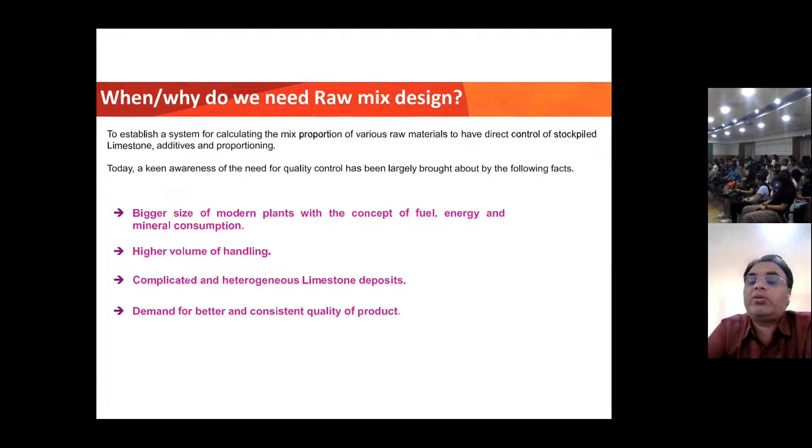So here to save the fuel energy and to use the alternate fuel, we are using AFR, alternate fuels, like the waste products I told you from many of the industries, right? And the mineral also. Suppose everyone is using the high quality limestone, then there will be depletion, and after some time there will be no good quality limestone. So alternate sources of limestone can also be used. In my next slides I will show you what are the other sources of limestone.

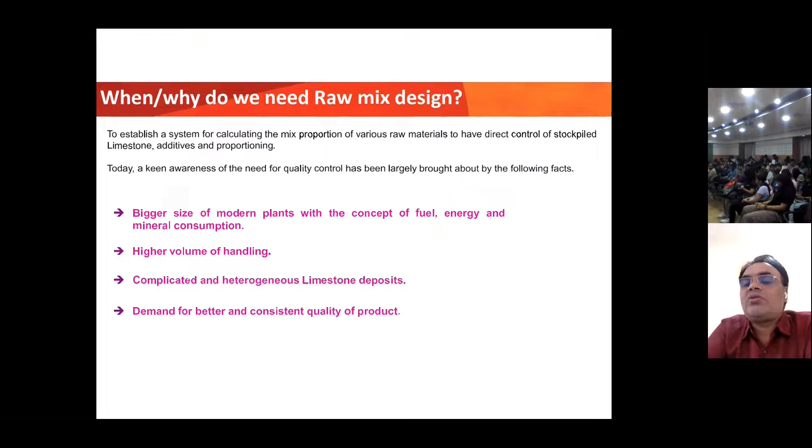And higher volume of handling, complicated and heterogeneous limestone deposits. Why modern systems need this type of upgradation is that before, nobody bothered whether your limestone deposit is heterogeneous or what. They were just taking the good quality limestone and depleting the other one. So they were not properly utilizing the limestone, right? Now we use everything; if rejected limestone is there, we use it in a proper way so that we can have conservation of natural resources.

And also, as I told you, the customer perspective has changed. Now they have become educated. Everybody is aware about the quality. Before that, nobody was aware. For them, cement was only cement, right? If it had that binding effect, they said it is cement. So nobody bothered about the quality. But now the customers are very educated, so they are demanding what they require, whether it is setting time or quality.

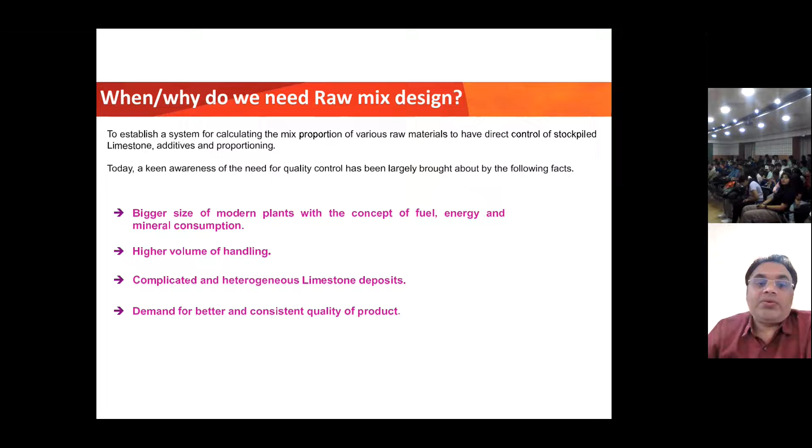Similarly, the raw mix. At that time only a few plants were there, so the deposits were very good, and there was hardly any situation where apart from limestone you had to use other raw materials in the raw mix design, right? Raw mix design is basically the design you make for your clinker and finally your cement. If your raw mix design is okay, your clinker quality will be okay, and finally your cement quality will be okay. So to ensure proper cement quality, you should have a better raw mix design, and for that, better raw material.

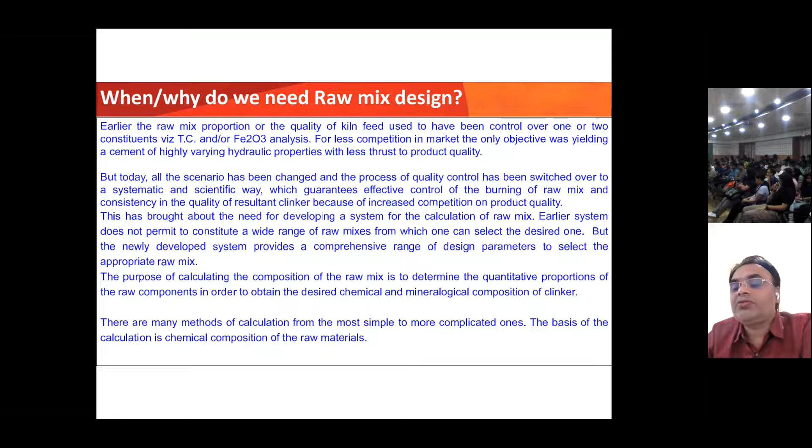As I told you, before, they were just selecting the good quality limestone, using it and making the clinker, right? But there was depletion. Now we have modern systems like CBA, that is cross belt analyzer, which selects the quality of limestone without deviations, so you do not have to do a lot of homework, and no quality deviation at the clinker stage.

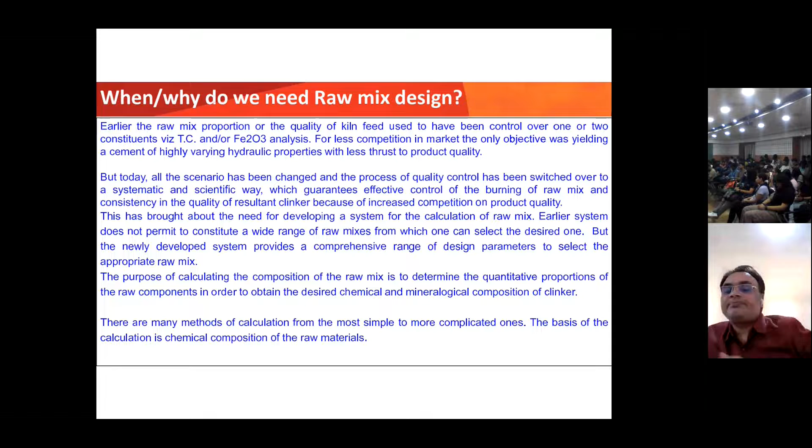Let me explain, because I'm always saying clinker, so you may be confused about what exactly clinker is. Clinker is basically the raw material for making cement. The raw mix you have made, after grinding, goes through preheaters with different heating capacities in the different cyclones, like 6 stage, 7 stage, and the material is very slowly burned, and different reactions happen. Starting from 150 degrees Celsius, the moisture of the ground raw mix is evaporated.

After that, entering the next system, the temperature is 300 degrees Celsius. Then in another cyclone, the same material is at 600, where there is dehydration, or calcination of magnesium carbonate. Limestone is basically calcium carbonate, and for making clinker the basic important parameter is lime, right? So at 800 to 850 degrees Celsius, calcium carbonate is dissociated into lime and carbon dioxide. This is the stage where carbon dioxide is released, at 850 degrees Celsius, right?

At the pre-calciner zone, this carbon dioxide is going to the atmosphere and polluting it. So we have to work with your guidance, with your experiences, because you are the new students, and new students have a new type of technology. We are with the old technology, old mindset. So here help is required from different research activities on how to capture that carbon dioxide.

Of course, research activity is going on globally on how to take the calcined carbon dioxide and use it again with that waste lime to make it limestone, so that limestone is not depleted, and the raw material you have made from arresting that carbon dioxide and the lime from the other raw materials can be used as limestone for making other clinker, right?

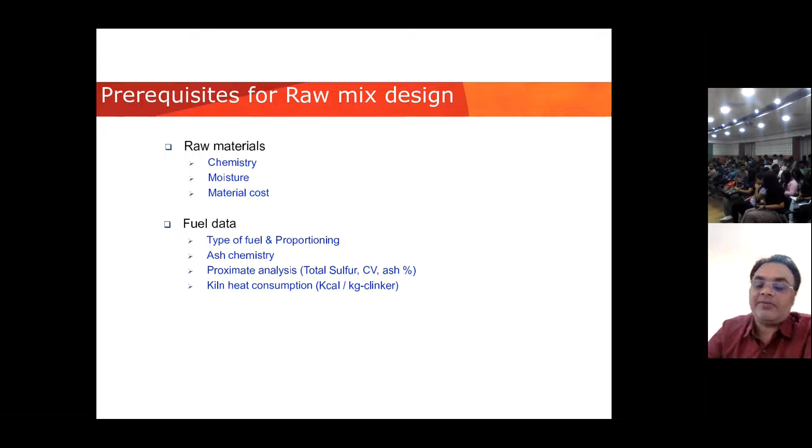In the kiln, the material at 850 has lime, and of course the other raw materials are also there, like alumina, iron, and MgO. So it all forms the clinker phases: C3S, C2S, C3A, and C4AF, right? So from the raw material, C3S and C2S are there.

All are governed by three governing factors from the clinker to the finished product, that is LSF, SM, and AM. LSF is the lime saturation factor, and it has a formula I will show you. Silica modulus is there, and AM is the alumina modulus. And finally, inside the kiln, your clinker is formed at a temperature of 1400 degrees Celsius, for which fuel is required.

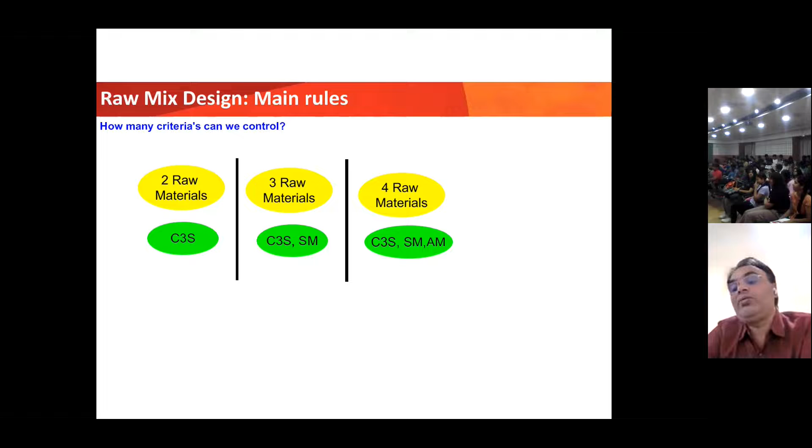The fuel is required both at the calciner stage, where there is calcination of calcium carbonate to calcium oxide and carbon dioxide, and similarly for your clinker phases, C3S, C3A, which should be good in the clinker at the kiln, that is at 1400 degrees Celsius.

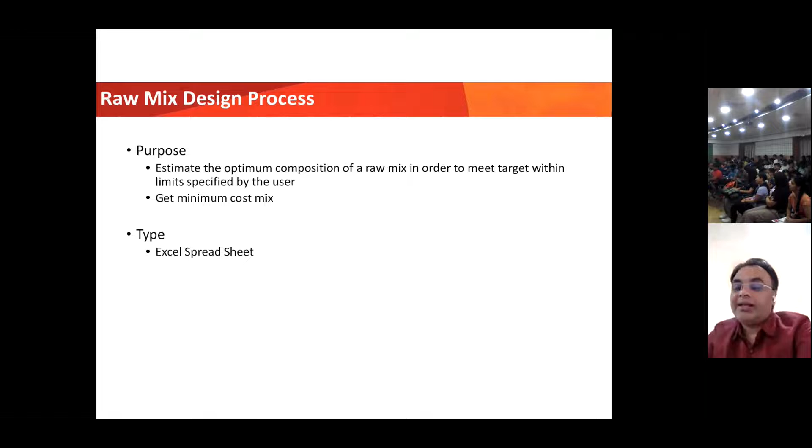So finally, when your clinker is produced, you are grinding at the cement stage. If you are making OPC, only your clinker will be ground with the gypsum, right? That is ordinary Portland cement. And if you want to make PPC, then power plant fly ash is added with this clinker and gypsum, and your PPC is produced.

And if slag is there, then clinker, gypsum, and slag are added, and your slag cement is produced, right? So this is the raw mix design, how it is designed. You can see that we are selecting, suppose, limestone, and clay if any deficit is there for alumina or silica. And if your limestone itself has all the properties, then no clay, no sand, no iron, nothing is required, right?

But if there is some deficit of alumina or iron, then other components are used. After that, you will write the chemical composition, what is the percentage of silica, what is the percentage of alumina, through different instrument techniques, like XRF, which is based on X-ray fluorescence, and XRD, which is diffraction technology. So this is the chemical composition based on the XRF study.

And finally, as I told you, cost is also important. If you compare cement with other products as far as inflation is concerned, cement cost is still on the lower side, right? For the cement industries, we cannot stop the infrastructure activity. So cost is also a very important part that we have to look upon, right?

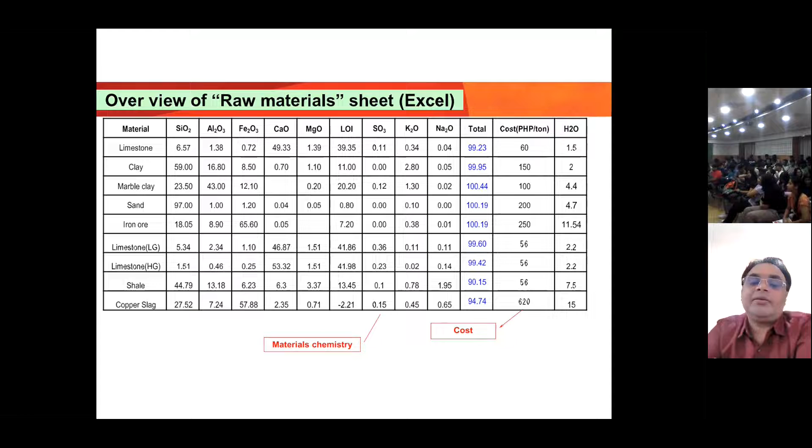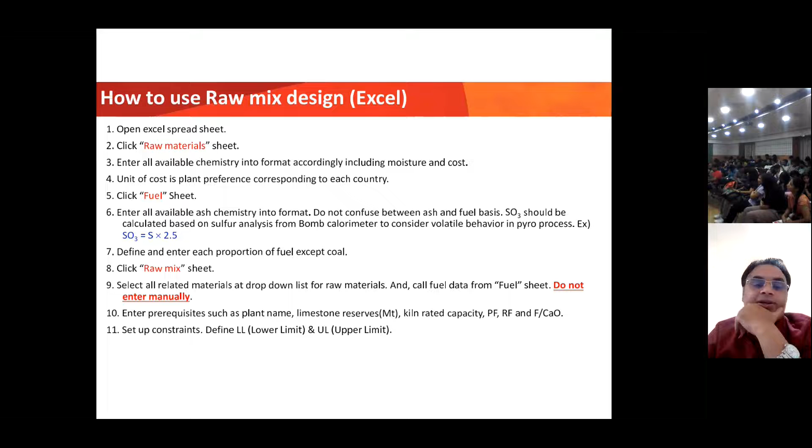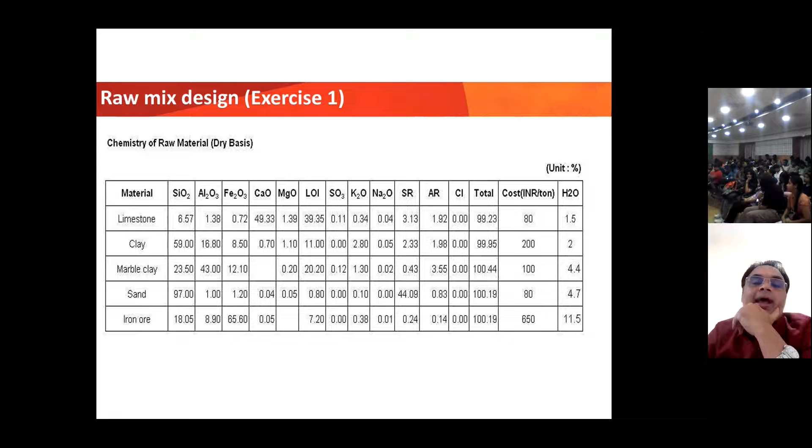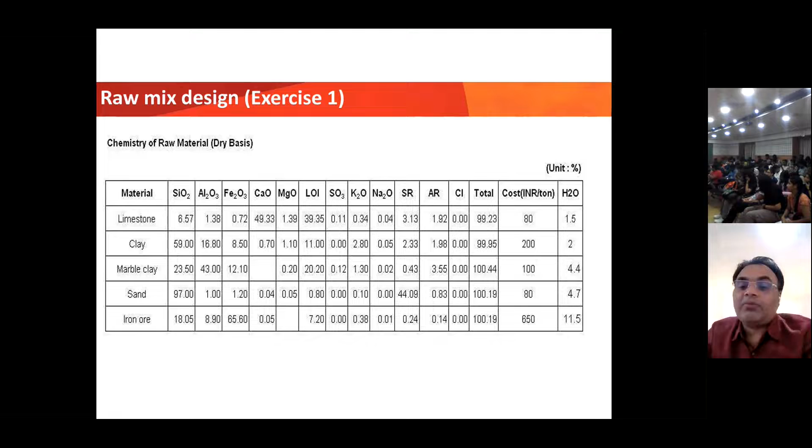So this is the Excel sheet that I have shown. This is calculated based on this one, and this is just based on the raw mix design. So I will not go into the details. This is the limestone quality, and what I was talking about, like alumina ratio and this one. So limestone is there. The basic components are silica, alumina, iron, lime. In limestone we see only lime. MgO is also a requirement, and sulfate, sulfur is also a requirement, and with that alkali like K2O, Na2O. I think you are a chemistry student, so definitely you might know what silica is, and with the XRF we convert them into the form of oxides, right?

And the main important thing is your fuel. Fuel is also very important, and as you know, the fuel is used to burn that raw material, because finally your clinker is produced at a temperature of 1400 degrees Celsius, or in some plants the burnability is very hard, where you have some quartz content. Because I told you that if you go into details, many things are there. If everything is given to you but the burnability is still not there, then you have to look for other research instrument techniques to see why it is happening, right? And finally you have to come to a conclusion. You have to see which raw materials have less burnability, which is easy burn, which is very hard burn, because high fuel will be consumed in that one, right? So finally, coal is being used.

So coal, you know, is used at almost 11 to 12% of whatever clinker is produced; 11 to 12% of the fuel is being consumed to burn the raw materials, right? And when there was huge consumption of coal, everybody started crying that after a few years there will be a scarcity of coal, so we have to look for some alternate options, right? So then pet coke came into consideration, because pet coke was the waste product from the oil and petroleum industries, right? It contains a good amount of calorific value, because CV is very important.

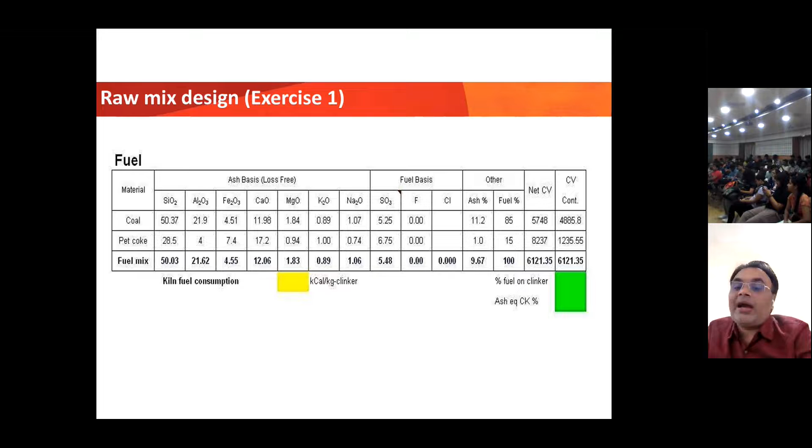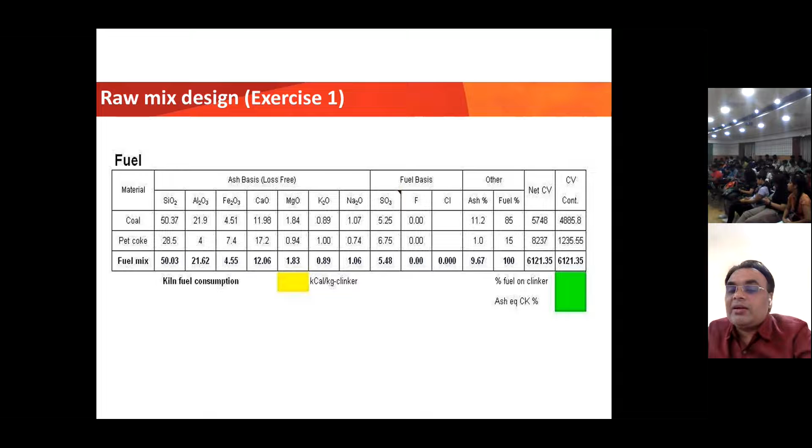You can see that whatever I have highlighted is written as net CV. Whatever fuel you are selecting is based on your net CV, that is net calorific value, right? So this plays a very important role in deciding the fuel mix you are going to give, and the burnability of the raw materials, right? And finally, the important parameter is fuel consumption, right? So this is the waste product. As I told you, we are also using a waste product as fuel, that is your pet coke, right?

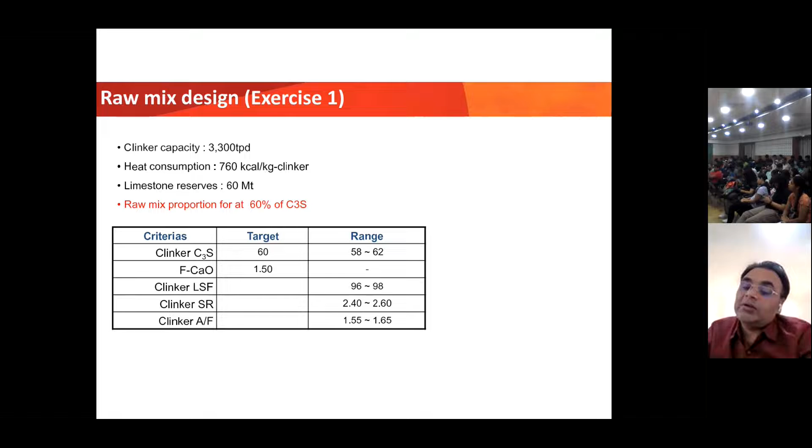These are the proportions of your clinker capacity. Clinker C3S is always in the range of around 58 to 62, and if it is on the lower side, then your clinker has very less strength, and finally your cement will have less strength. For making your clinker C3S in the range of 58 to 62, you need the LSF between 96 to 98, and similarly the silica ratio of 2.4 to 2.6. And all these important parameters like your LSF, silica ratio, and A/F, that is alumina modulus, these ranges are used to get your clinker with C3S percentage of 58 to 62.

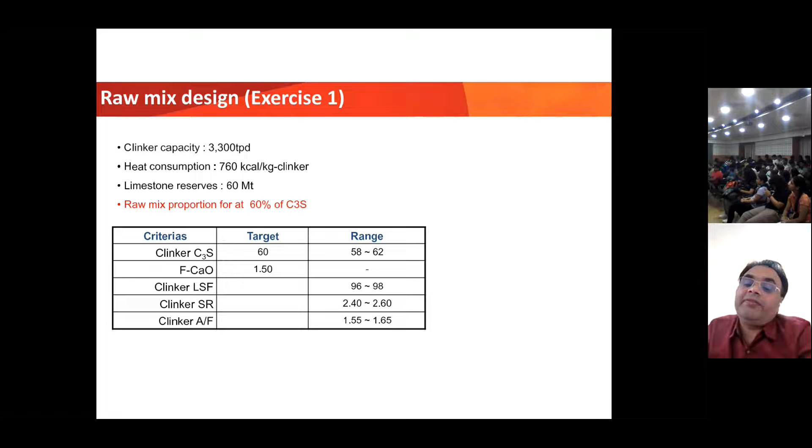You might be aware that if I'm talking about waste products, then red mud is also a waste product from the alumina industries, right? So like slag, fly ash, and AFR (alternate fuel resources) are waste products, similarly red mud, which is a waste product of the alumina plants, is also used in cement industries to maintain the balance of alkali and sulfur, which due to changes in fuel can have harmful effects.

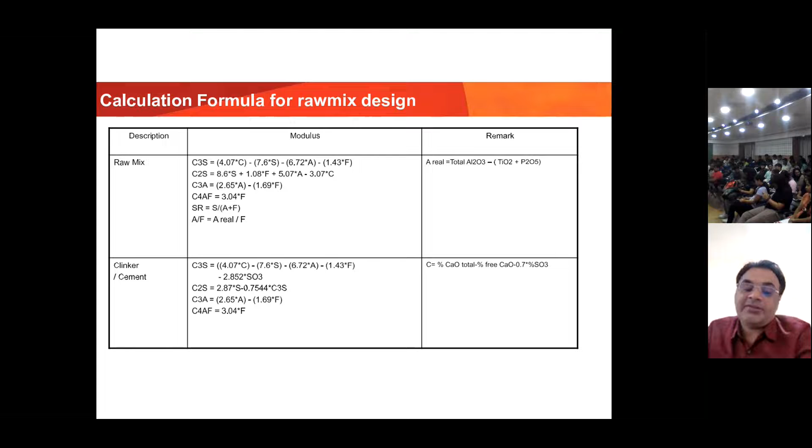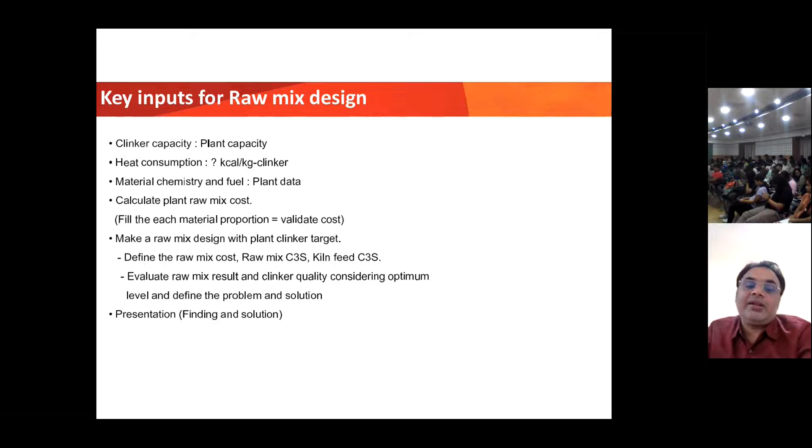I will not go into how we are making the clinker capacity, but based on that, how we are designing the raw mix, and finally improving the quality. This is the raw material chemistry.

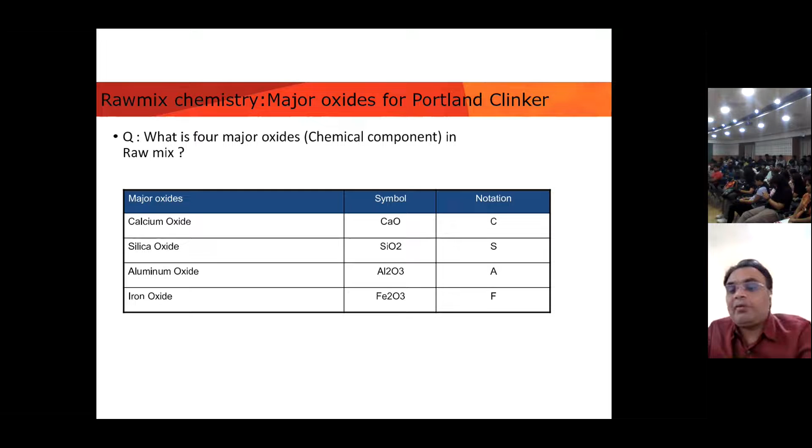As you know, the four oxides used for calculating your C3S are lime, silica oxide, alumina, and iron. This is applicable both for your raw materials and also for your clinker.

But bauxite is a mineral, and this can also be depleted because it is a source of alumina only. So now we are using red mud, which is the waste product from the alumina plants.

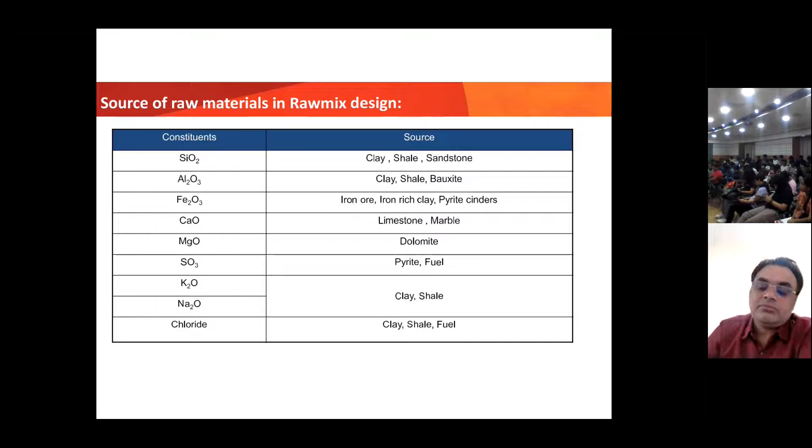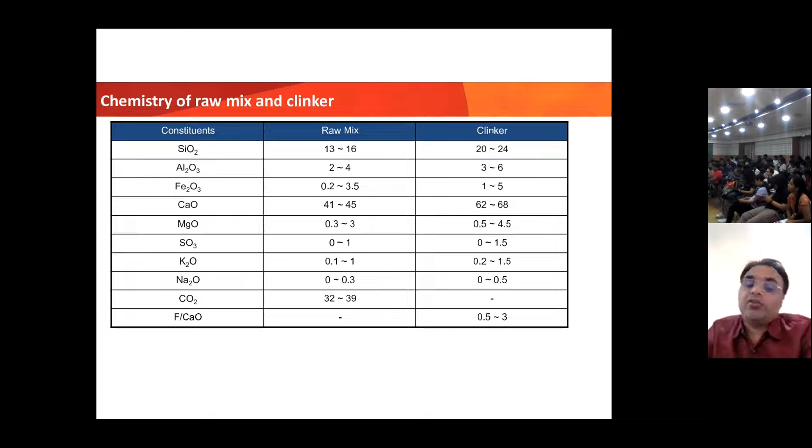So these are the ranges in the raw mix design and what you will get in the clinker. If in the raw mix design you fix the silica, I have given the ranges for all cement industries globally, that is 13 to 16, so in the clinker that silica will be 20 to 24.

If your alumina in the raw mix is 2 to 4, in the clinker it will be 3 to 6. And if iron is there, then 1 to 5, and lime is 41 to 45. So in clinker, it will be giving 62 to 68. That 62 to 68 is finally your conversion factor.

So don't be confused about why in the raw mix it is 41, and how in the clinker it has increased, right? It is due to ash absorption and also the clinker factor.

You know that suppose 1.5 ton of raw mix is given inside the kiln, then only 1 ton of clinker will be produced, right? So that other 0.5 will be the loss. What I've shown is the calcination loss, and other losses will be there.

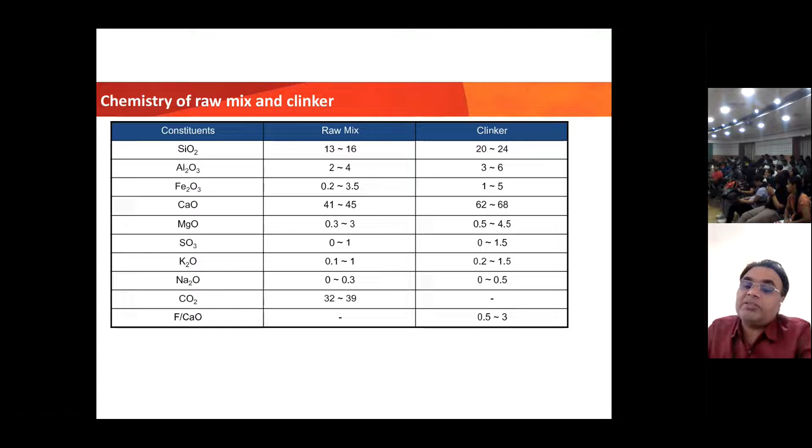So the factor is calculated from the raw mix to the clinker factor, and it will be 1.5, or in some plants 1.56. It depends upon the loss, based on ash absorption. If you compare with the clinker factor, 41 into 1.5 will give you a value near about 62. So this is the formula for the silica modulus.

Now, what will happen if any of these factors go up or down? It will deteriorate your clinker quality, which is governed inside the kiln. So the process should be controlled and effective enough that whatever you are producing is in a better way. So these are the typical ranges.

If any silica modulus, suppose you have selected in the range of 2.4, but if it is more or less, then what will happen? It governs the solid-liquid phase and indicates your raw mix burnability. If it is high, your raw mix will be very hard to burn. So everything has to be taken into consideration, right?

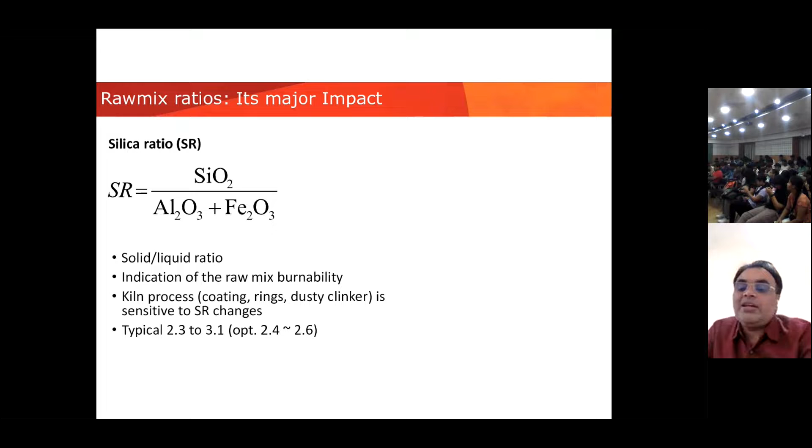Similarly, so what will happen? I told you that if it is high, the burnability will be difficult and there will be high energy consumption and poor clinker quality. So you have to put it into that range, right?

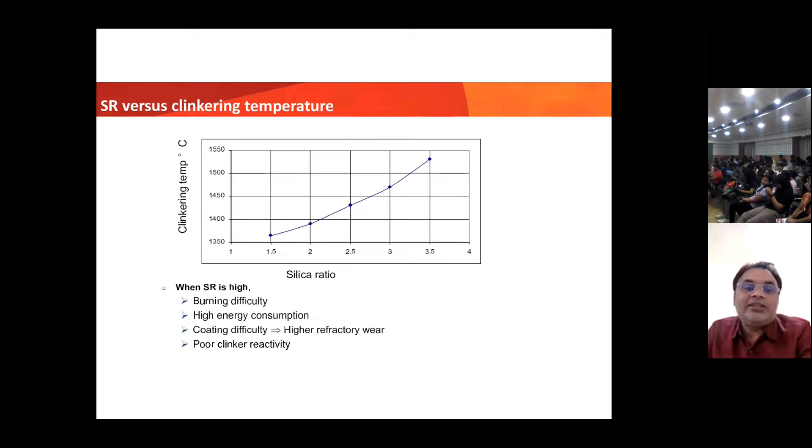I think many people would have seen that clinker, how it looks, and if nobody has seen it, then I will request the faculty to at least make them visit the cement industry so that they can understand the process and also understand how the clinker is formed and how it looks like.

So to make that clinker, in the nodule formation, a lot of activities has to be done. Because I am unable to show all these activities through the presentation, but it is a very tough task to make that clinker - a long process, long energy, and a lot of manpower is involved in that.

So when you are visiting the plant, you will be aware how much effort is being put in, because finally when you are going to make your house, you are just buying 50 kg of cement or whatever the consumption is, just to have that binding effect. But for making that cement, how much care we have taken and how much effort we are putting.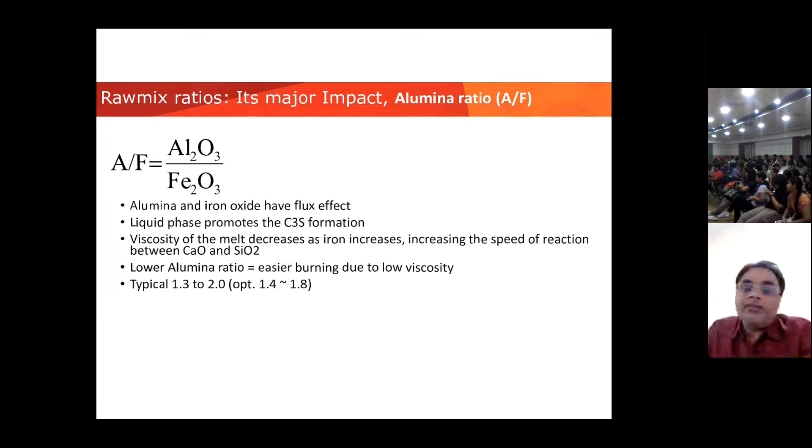So this will happen - what will happen if your LSF is high? So what will happen if your AM is high? Similarly, this is the relation between the temperature. Finally, in the clinker, whatever is produced, it is C3S, C2S, C3A, and C4AF.

C3S is your tricalcium silicate, which is formed by three molecules of lime and one molecule of silica. Similarly, for C2S, two molecules of lime inside the clinker react with the silica to form C2S. Then C3A is there - three molecules of lime react with the alumina in the raw mix to form C3A. C3A acts like your gypsum, which is a setting time regulator, right?

Because setting time is giving the time to mold whatever cement is being used. If your setting time is less, you will not get the time. So based on the requirement, we have to decide the setting time also.

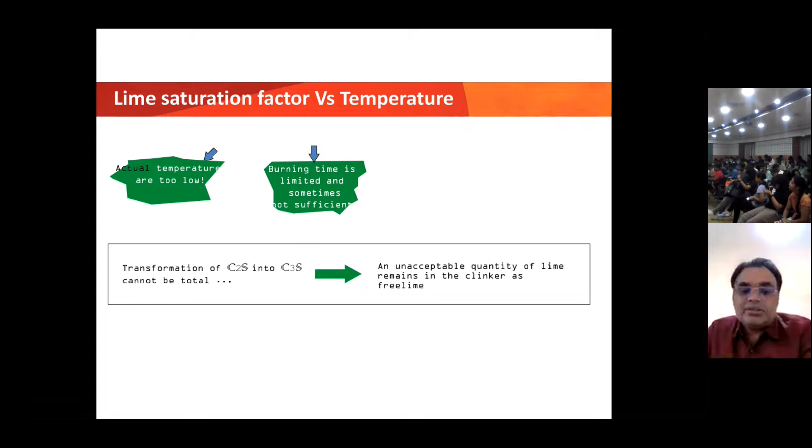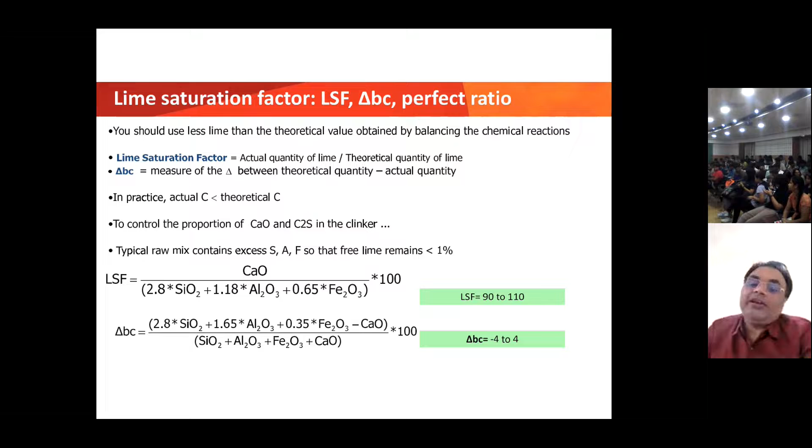This is the LSF formula, which is applicable based on certain scientific notations. We have identified why this factor should be taken and what should be the range. Similarly for iron, what should be the iron range, and CO2, whatever you are looking at, it is your calcination, right? And this Lime Saturation Factor, LSF, is the transformation of your C2S into C3S, right?

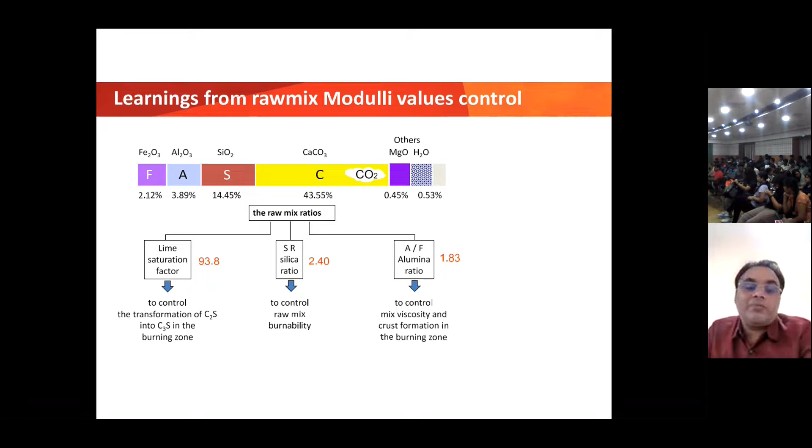And similarly, if we are talking about the silica modulus, it controls the raw mix burnability, and this is the range. From where it is coming - you can see in the upper side it is written silica 14.45%, right? And A upon F, that is the alumina upon iron ratio, it controls the viscosity, and it is also used for the liquid formation for making the nodulization of your clinker, which can finally be used in your cement grinding to make your cement.

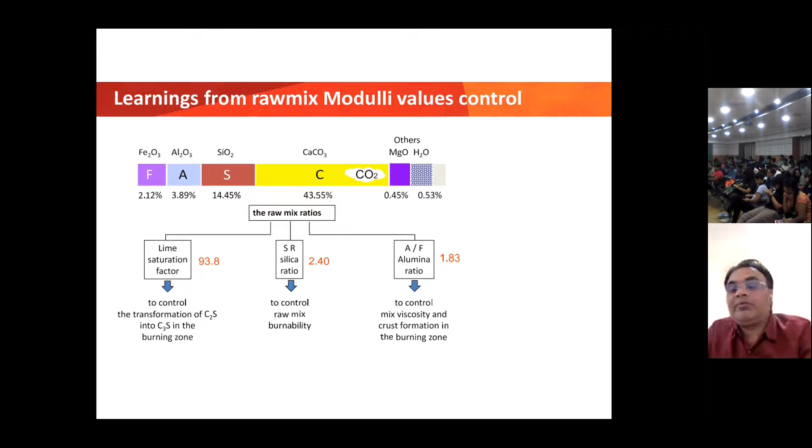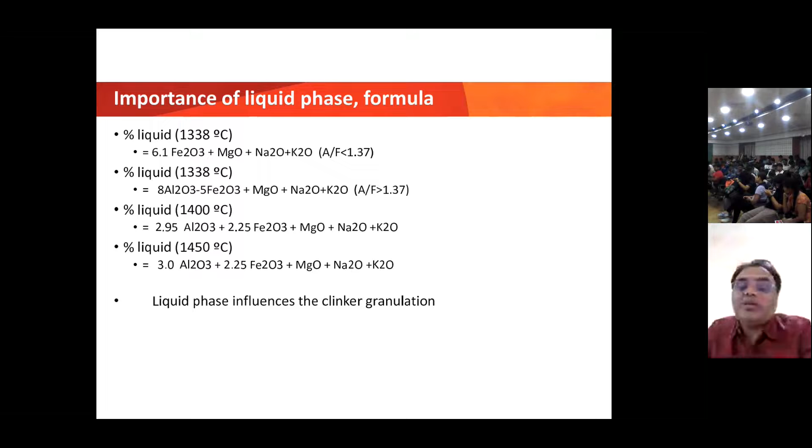Because of the alkali-silica reactions, alkali silica from the aggregates, and alkali whether it is coming from the cement or from the aggregate, whatever you are using, right? So you have to ensure that whatever alkalis, whether from cement or aggregates, they match so that you can have better concrete quality. So it modifies the workability and promotes the alkali-aggregate reaction with the concrete admixture.

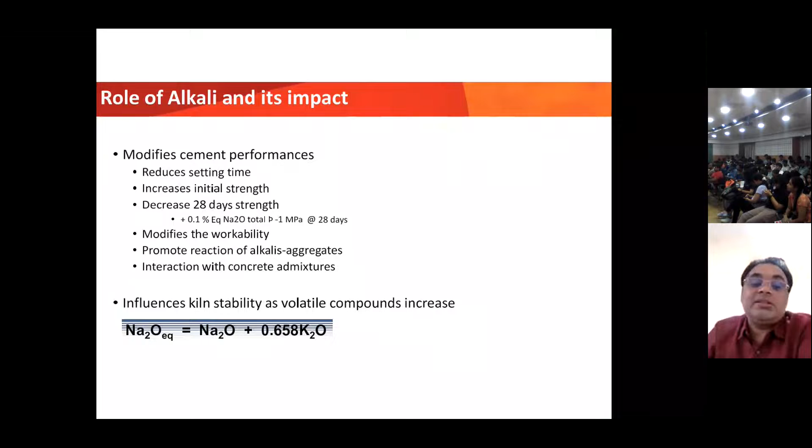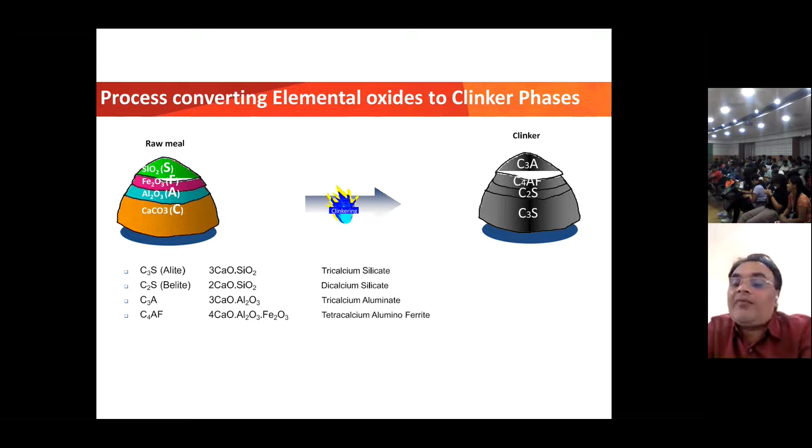After that, you have the clinkering temperature - the temperature at which your clinker is formed. It is converted into C3S, C2S, C3A, and C4AF - that is in the clinker. As I already told you, these are tricalcium silicate, dicalcium silicate, tricalcium aluminate, and tetracalcium aluminoferrite. So this is the formula, and this is finally what we see in the clinker, and we know the ideal parameters for that.

This has to be understood in a better way. What I have written here as C3S is alite and belite, because it also has different forms. If your C3S and C2S are good, but you are not getting better strength of the clinker, then it has different polymorphs - there are 7 types of C3S and 5 types of C2S. Alite is the form because many types of impurities are present, and belite is also like that. I will not go into details - if you are researching specifically on clinker, then you might need to understand these things.

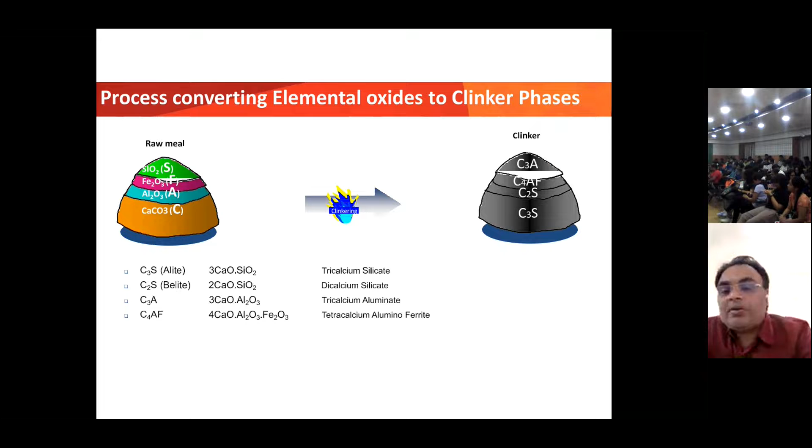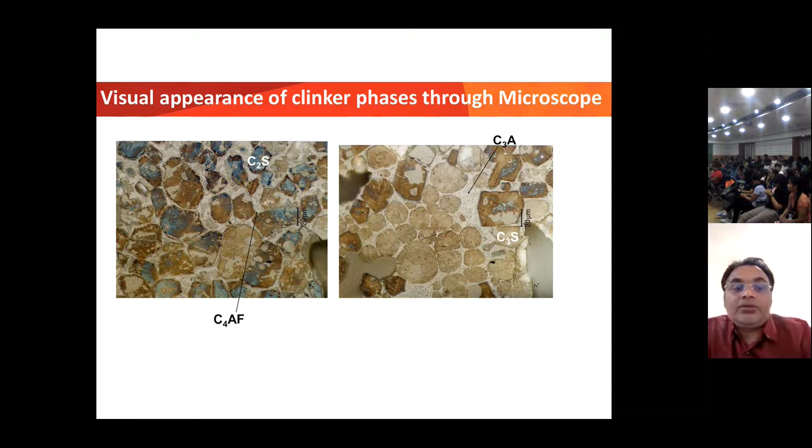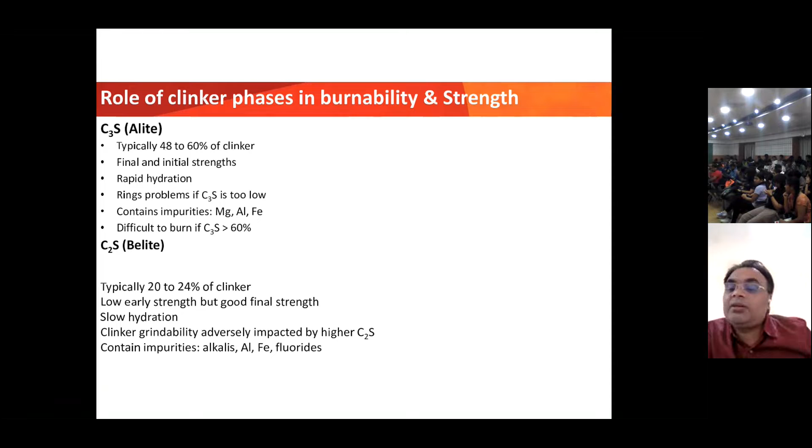And if you want durability and later-day strength, then C2S should be high. So finally, if you go with high belite cement - you might be aware people started going for high belite cement - it is normally made with a good amount of C2S, where you consume good quality limestone. This is similar for C3A and C4AF.

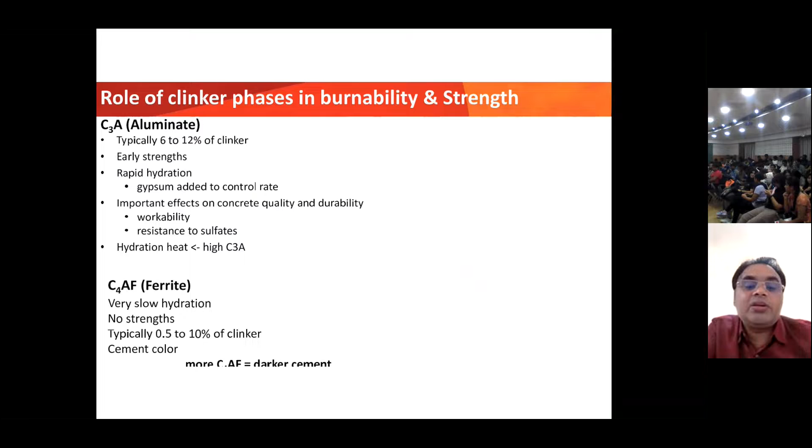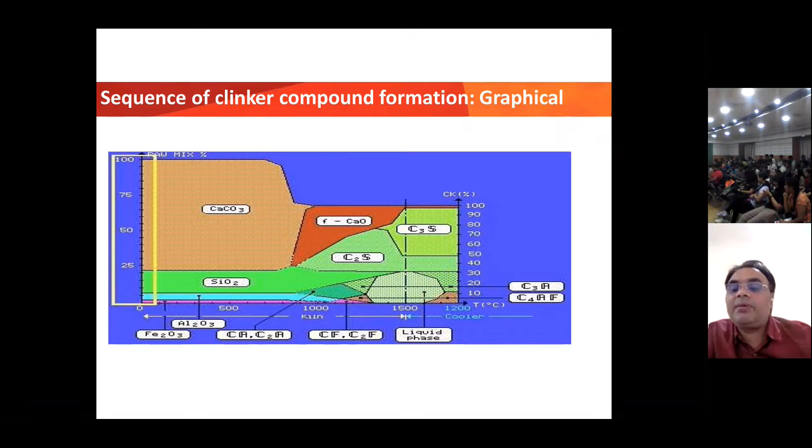You can see I have shown this through graphical presentation. From this, I think you will understand exactly what reaction is happening in the raw mix to make your clinker. This is limestone, the source of lime in the raw mix design, which is the basic raw material for making clinker, and it contains lime 75 to 95%.

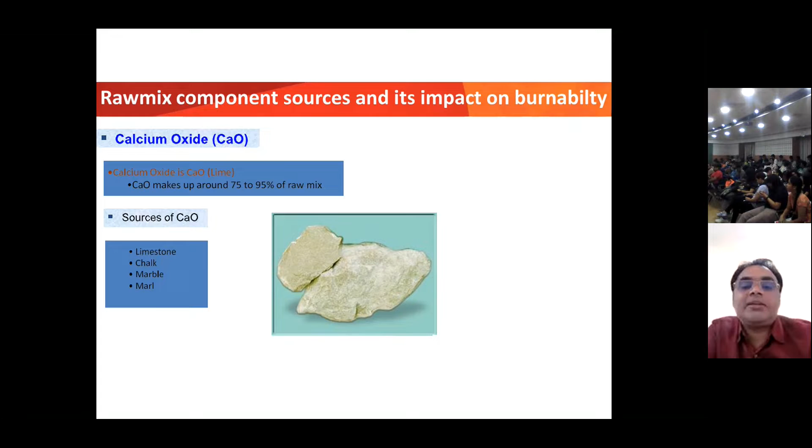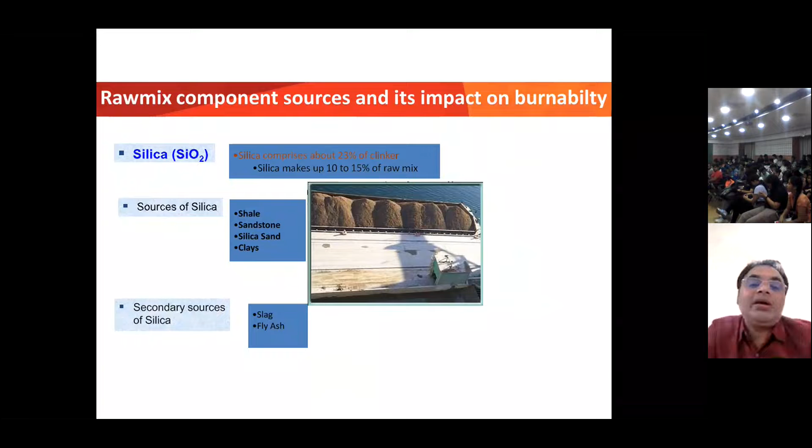Similarly, the sources of alumina are bauxite, shale, clay, and kaolinitic clay. Secondary sources are fly ash, laterite, and red mud, which is a waste product from other industries.

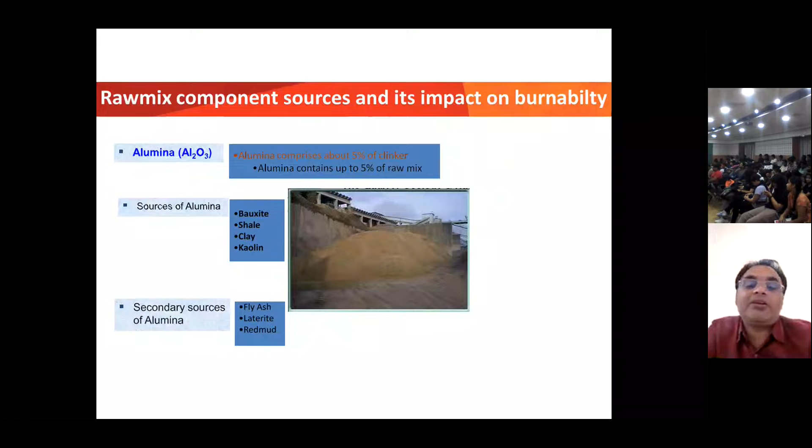This is the waste product for iron, and the main sources of iron are iron ore, normally in the form of hematite and magnetite, and shale. Waste products providing iron are fly ash, slag, and copper slag - copper slag is a waste product from the copper industry, slag is from the steel plant, and fly ash is from the power plant.

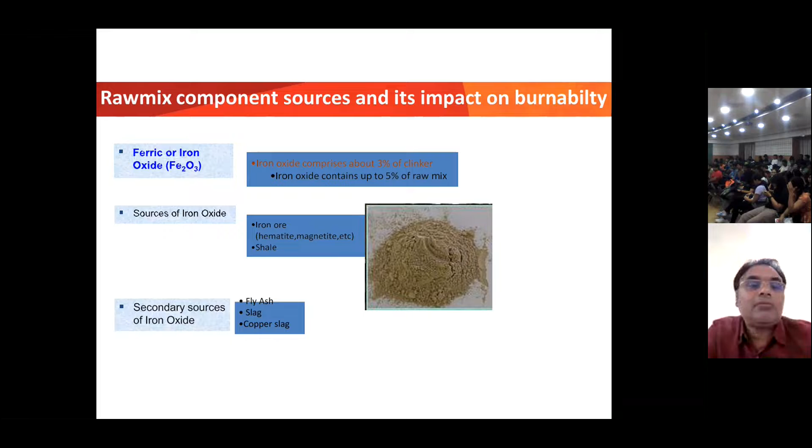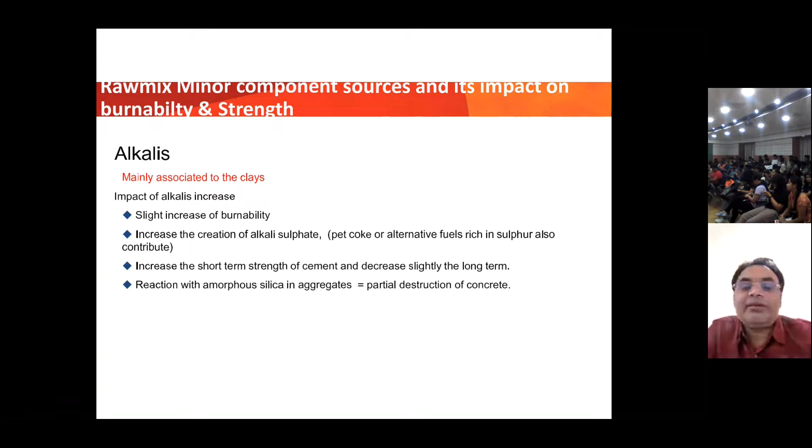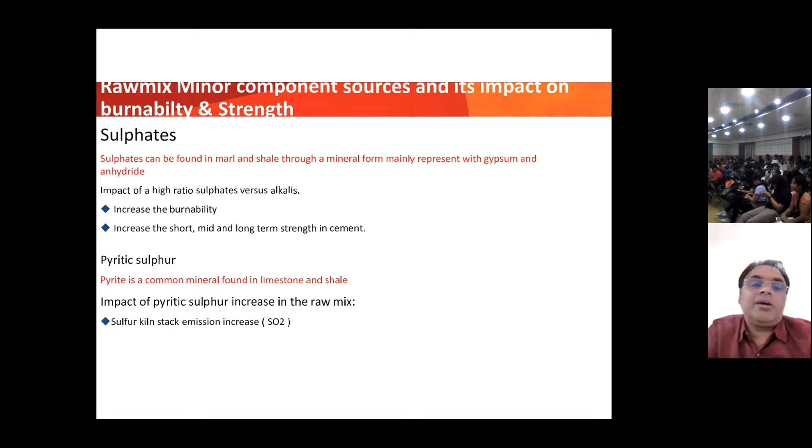Alkalis, I told you already what the impact will be, with this ASR, and how it will deteriorate your concrete quality. Sulfates, of course, come from gypsum, the setting regulator, and also from limestone in the form of pyritic sulfur. This is like organic carbon, which is there, which is making your raw mix hard.

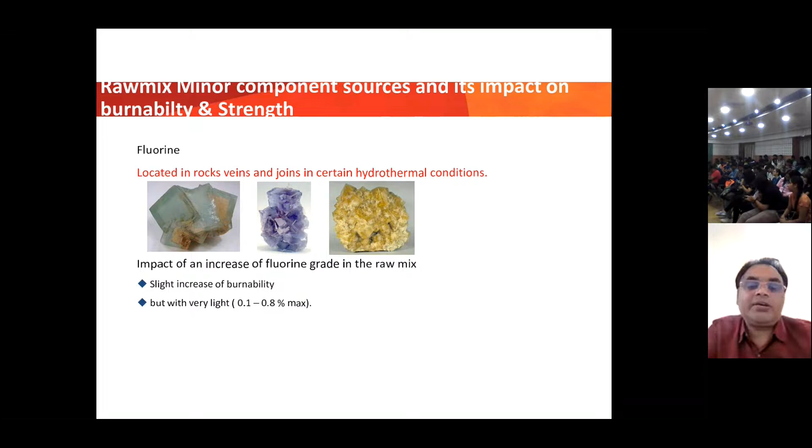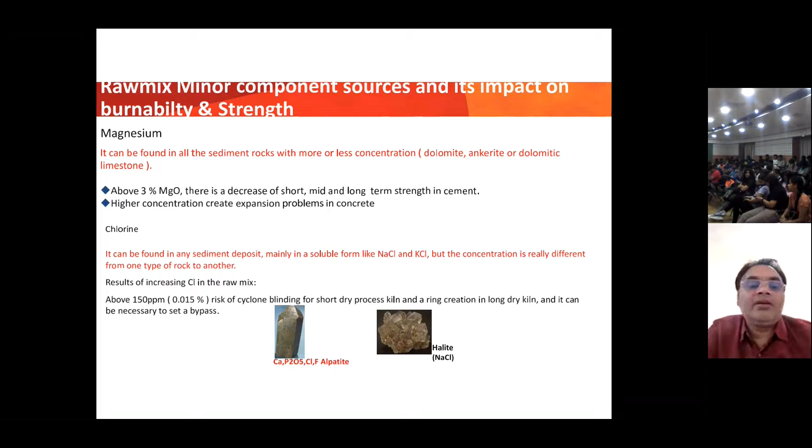And chlorine, you know that chlorine is very dangerous, and we cannot accept it because for concrete also efflorescence will be created, and a leaching effect will be there. So if in my limestone these patches are there, how will we identify that chlorine is there? So these are certain concentrations found in the major sources for alkali, sulfur, chlorine and MgO raw materials.

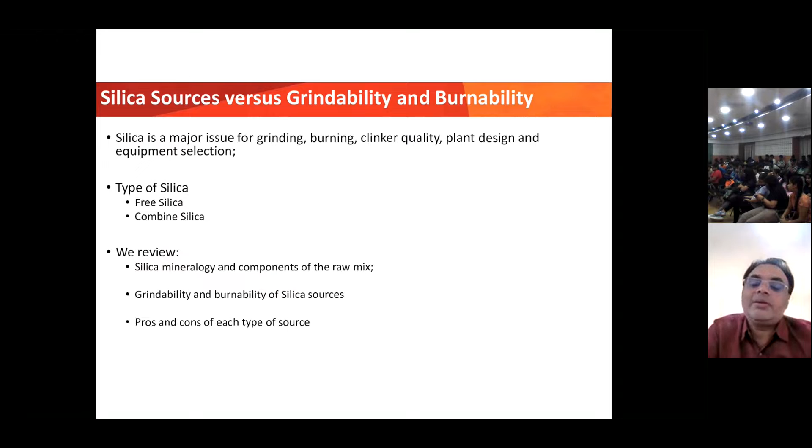Silica is very hard to grind and needs a high melting point. So you need a better silica source so that your melting temperature will be less, and based on that you can have good burnability of your raw mix. Similarly, there is free silica, right? I already told you that whatever quartz is there, if it is in the form of free silica, it is very dangerous.

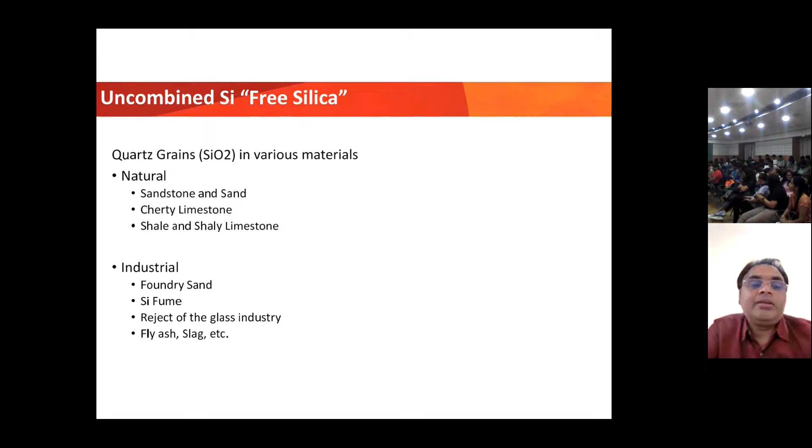It is kaolinite, and I think everyone is aware of LC3, limestone calcined clay cement, in which we are using waste products for making the cement, and where the clinker is very less. Kaolinite is a good source of alumina, and it helps to make your LC3 cement, right? So LC3 is totally based on this kaolinitic clay.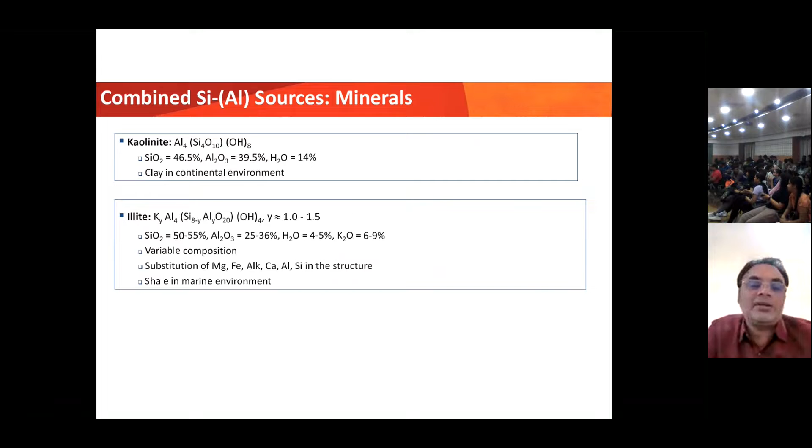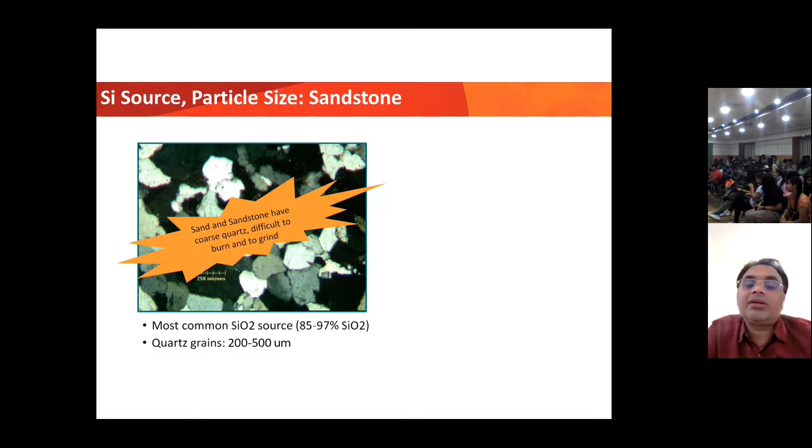This is what will happen if your silica source increases, and how it will impact the burnability. Sizes are also very important; there comes the role of the microscope. Similarly, for limestone also, sizes are very important. It has to be ground in the raw mill, so the residue is a very important parameter.

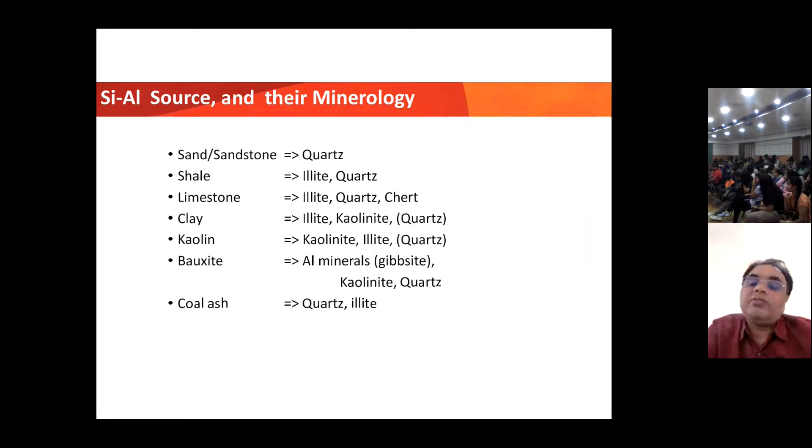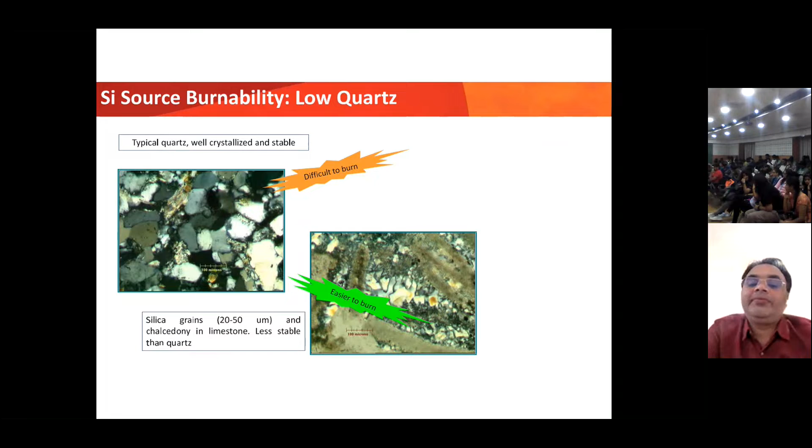These are the forms when you are doing XRD, how it looks in the cell. Your silica will be in the form of illite, and quartz and limestone will be in these forms. So this is how it will look in XRD. For easier burning, the sizes given are less than 20 micrometers. Then your burnability will be very good. So this is just a small general overview.

So, as a concrete engineer, what are my expectations of all of you, because you are from the first year, I understand from the faculty. Of course, many researchers are using tools to make your raw mix design easier to burn, right? But as a researcher, I need to know how you can reduce the clinker factor, what technology you can adopt, and, as I mentioned, a very important parameter is the calcination of calcium carbonate, where CO2 is emitted.

How you are going to use that CO2 and use it as an alternate raw material. So these are the things that you can use it for. Now 3D printing is there, right? So how to fast accelerate the work: now in concrete technology, 3D printing is being used.

So my understanding is you guys can really do a lot. You can innovate in a better way and contribute to the cement industry with your thoughts and ideas, like how we can improve our reactivity, because finally it is going to be used in your concrete industries, right? So how you are going to improve the quality of the clinker, and how all this fuel or this limestone is being used, how you can optimize it in a better way.